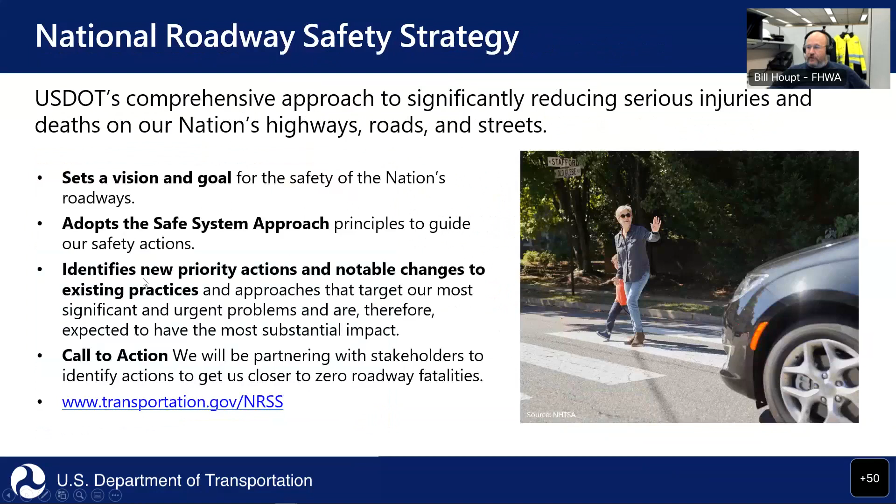So here you see the safe system approach, which is one of the key components of the National Roadway Safety Strategy, and is somewhat of a shift from the conventional infrastructure-focused safety approach. While no crashes are desirable, the safe system approach prioritizes those crashes that result in death and serious injury. It recognizes that human beings make mistakes and are vulnerable, and attempts to design a system that works together, providing layers of redundancy to lessen the effects of these mistakes and vulnerabilities. Fatalities and serious injuries have really been on the rise the last few years in Pennsylvania, and on a national level they've been increasing over the last decade.

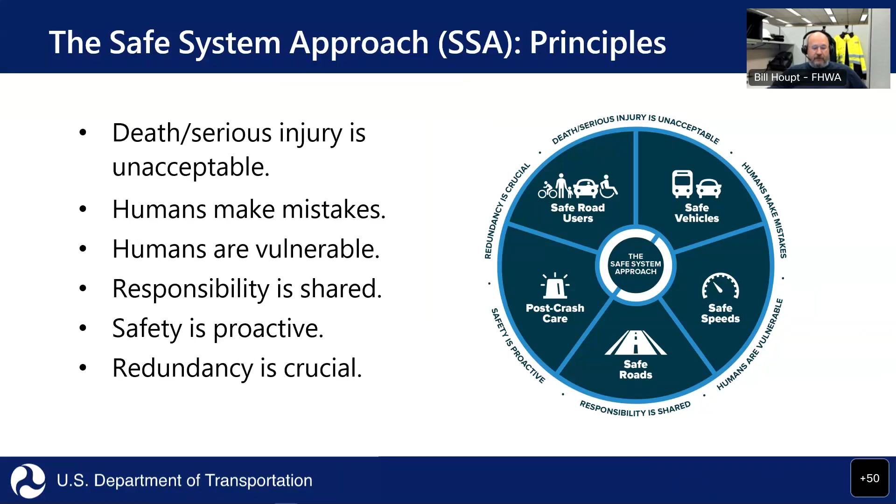Even more so, crashes among the vulnerable road users, specifically pedestrians and bicyclists, have been increasing even faster. And this has really resulted in a focused emphasis on these vulnerable road users to try and reverse this trend. Addressing all the various road-related fatality types is really going to take a holistic approach, and that is what the National Roadway Safety Strategy attempts to do.

And as part of that strategy to address all road users, the Bipartisan Infrastructure Law created this Safe Streets and Roads for All grant. This grant provides $5 billion between 2022 and 2026, and this grant specifically is addressed at non-state entities such as an MPO, county, and local government. It's a little bit different than the HSIP program that was

But there are two types of projects that can be applied for. These are the implementation grants and action grants. And basically, before you could do an implementation grant, the applicant must have a safety action plan in place that meets the requirements of the grant. This is somewhat similar to the HSIP program that requires states to have a strategic highway safety plan. But this is, like I said, addressed at those non-state entities.

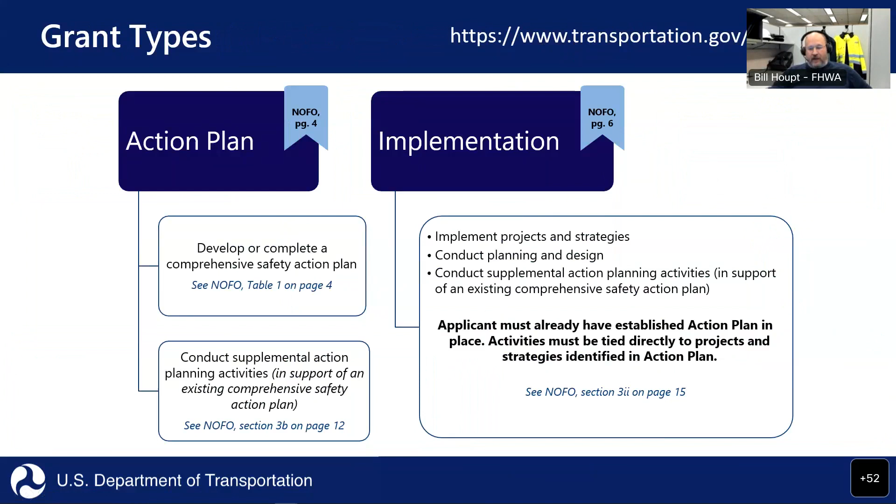And this is kind of a slide that really gives you some direction on how you can go about figuring out what you need to do. And let me see if I can go back to this last slide. I just wanted to point out up here in the upper corner, there's a link to that grant if you want to find out more information. And really, there's a lot of details on there between the different plan types and what you need to have for both. So I just want to make sure I pointed that out.

And like I said, this is telling you to look at what you have. Do you already have an action plan? If yes, does it meet the requirements? Because there's specific requirements that the action plan has to have before you can do those implementation plans. And the implementation plans really specifically have to look at those actions that were in your action plan and address one of those.

And finally, I just wanted to thank you guys for the opportunity to speak this morning. Just give a brief introduction on some of the things we're working on, and really just remind everyone what the focus and purpose of everything we do is, whether directly or not.

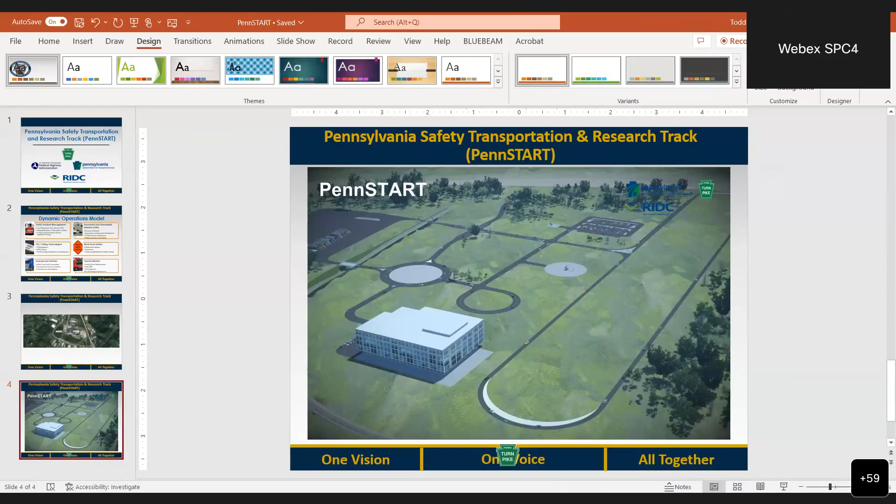Thank you very much, Todd. Greatly appreciate that. I know you have a busy week here, so I appreciate you squeezing us in for our presentation. Are there any questions for Todd?

Coming at you live from my living room. Looks cozy.

I'll just make one comment. It stinks that the original plans fell apart at Penn State, but it's great to see that this has moved into our region for our first responders and for our universities and everything. And not to mention, it's about 15 minutes from my house, so this will be excellent. Yeah, I think this will be a facility that could be used very, very much.

We were happy when we did the press event. We had Chief John Story, who's a good team partner for us, who's the assistant chief for the Hempfield Township Fire Department, and they helped us out. And we're excited. We want to get some training through our Penn Time group set up for when the facility opens. Part of the facility should open by the end of 2023.

With the rest of the facility, they would like to move aggressively and have it open by the end of 2024. So they're starting Monday, the 24th, with a meeting to talk about some of the design elements they want to put in here, and go from there.

Hey guys, can you guys hear me? Anthony Castellone? Yep, we can hear you, Anthony. Hey guys, welcome.

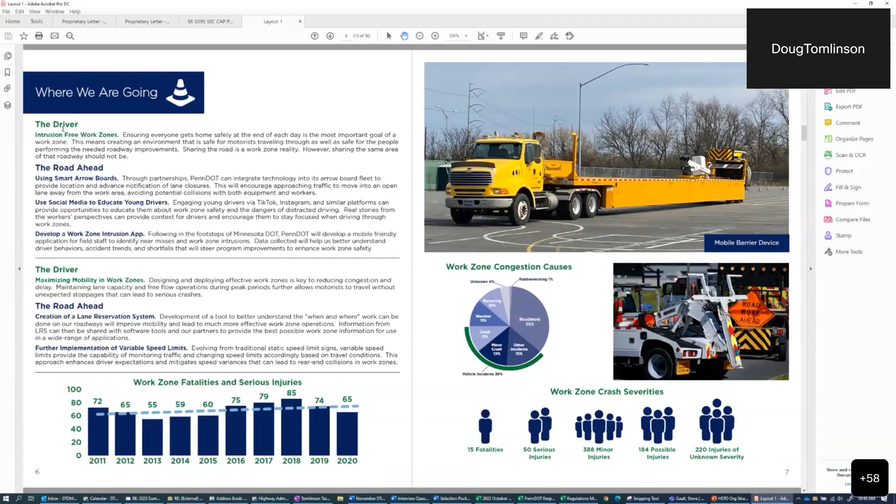And then we go into what we're describing as where we're going for the next few years, trying to step back, each of the units step back and look at what they see is truly driving their business. And then from there, what are we doing? What does the road ahead look like here over the next couple of years? So it's laying out some of the more major undertakings that each of these units are going to be striving for over the next few years.

So that's the document in a nutshell. It goes through and does the same thing for each of the 12 units. So if you're interested in understanding what HSTO is about, what we're trying to do, and where we're heading, this is a good document to do that. So with that, I'll turn it back to Josh.

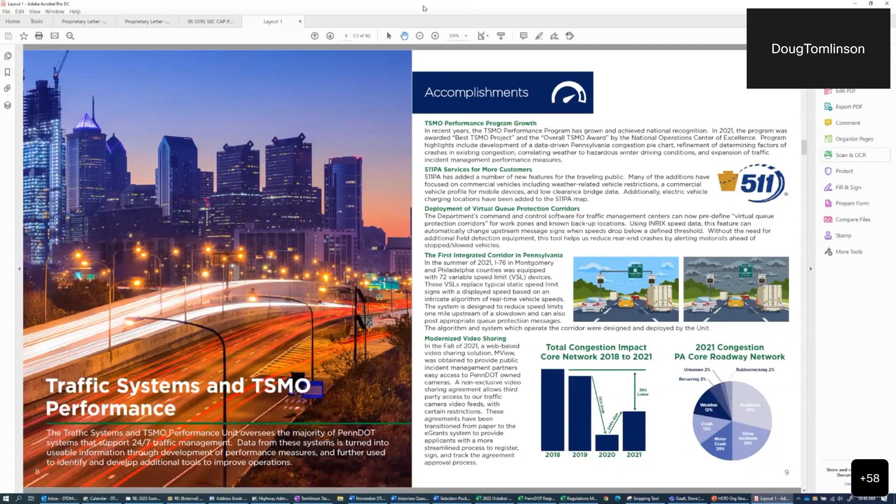Excellent. Thank you so much, Doug. I appreciate it. Any questions for Doug Tomlinson? And yes, I do have a copy of this. I will make this available to the group after the meeting, as well as it'll be posted on our website. Any questions for Doug? All right, hearing none, we will move on to item number 5 on the agenda.

I'd like to introduce Mr. Scott Thompson Graves. He is the Senior Vice President with WRA, and he will be talking about the City of Pittsburgh Smart Spines Project Update. Scott, I'll turn it over to you. Thanks. Are you guys able to see my screen, Josh? Yep, you are good. All right, perfect.

Yeah, so thanks for inviting me, Josh. Josh had asked me to give you guys just a brief status update on the City of Pittsburgh's Smart PGH project. So just a little bit of background. I know we've talked about this previously in this venue, but for those of you who aren't familiar with it, it's an advanced traffic signal and systems project along 8 corridors in and approaching the city of Pittsburgh. It includes a total of 135 intersections, and it's a pretty interesting deployment of a mix of different technology in order to improve mobility.

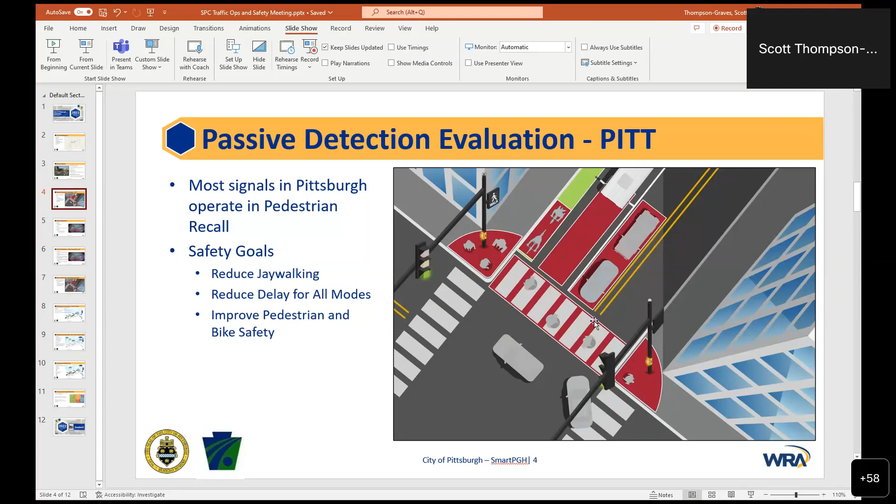So some of the challenges that we run into as we started to think through that system within the city of Pittsburgh specifically is that a lot of the corner radii at the city streets are actually pretty tight. And so if a pedestrian arrives at a corner, like the one that's shown on the forefront of the screen here, you don't really know which direction they want to head in the traffic signal. And so that poses a specific challenge for passive detection.

Another challenge is that by default, if you push a push button and actuate a pedestrian phase within the traffic signal, that is a locking call. And that poses some challenges as well, because a passive pedestrian detection system will detect someone as they arrive at the corner, but then if they depart, it'll have placed a pedestrian call, and with those locking calls, that'll then hold that phase and call it even if nobody's there. At that point, you're pretty much back to square one, and the signal's operating like pedestrian recall.

So some of the advances that we've been able to work through working with Intelight and their MaxTime folks, as well as the local provider of the software, is the introduction of a ped cancel feature, which I'll talk about. We've also included the ability to, since we can detect pedestrians that are in the crosswalk, if a pedestrian is going slower than anticipated, program the signal so that it will extend the adjacent phase. So if there's a pedestrian in the crosswalk, we basically just won't release the potentially conflicting vehicular movement in order to allow those pedestrians to safely cross the street.

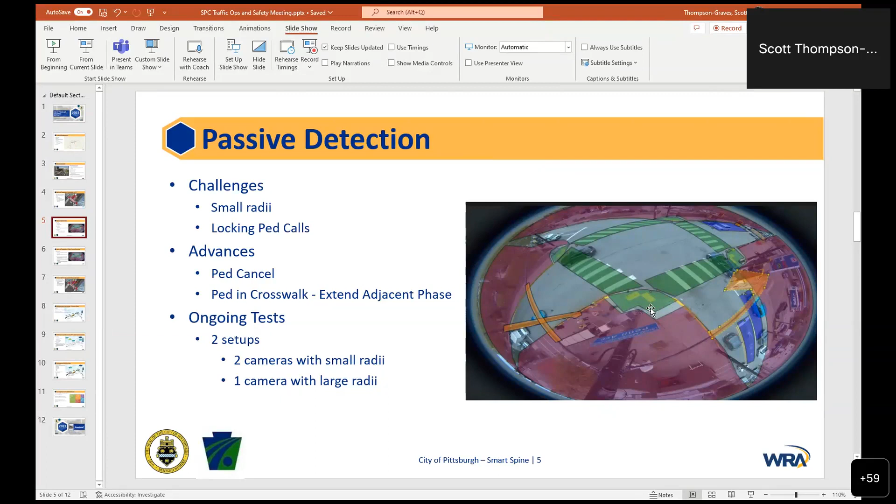As far as the pedestrian rules we're using in our traffic signals, by default we're assuming if there's a pedestrian on any of the main street phases, so 2 or 6, the other phase will automatically be called. You'll always get the pedestrian phases called for basically both sides of the street. The same thing happens on phases 4 and 8, the side street calls. That helps improve safety and mobility because we're trying to cut down on jaywalking.

At the corners with the close ADA landings that I described earlier, we've established a set of rules to help overcome some of the challenges with not knowing which direction the pedestrians want to head.

Any pedestrian arriving at any of the corners will automatically call both the Main Street and the side street pedestrian phases. The next ped phase in order will automatically be called, and that'll be a locking call. So if they arrive and ped phase 2 is the next phase to be called in order, that's automatically going to be called. If the pedestrian then departs the corner, the remaining phases will be canceled, so they won't be called if there's no longer a pedestrian there.

That's new functionality for the controllers that's recently been deployed, and it required some custom programming to make it work.

The University of Pittsburgh is doing a before and after study of the pedestrian detection deployment at both of these locations. They're evaluating not just the effectiveness of the equipment at detecting pedestrians, but also things from a design perspective. Neither of these intersections are ones we designed — they were just pilots that were already available elsewhere in the city.

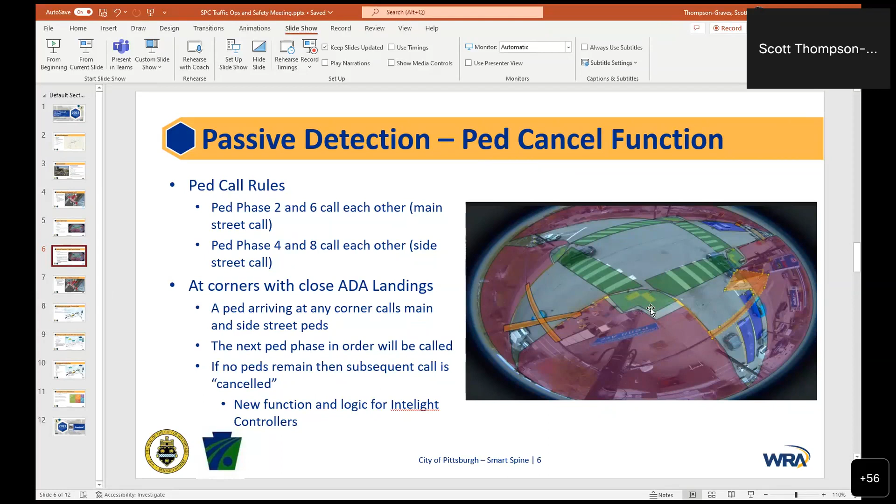Another advancement we're requiring from our detection system is to treat the detection we deploy at intersections not just like traffic signal detection, but more like an ITS camera as well, because a lot of the cameras, radar, or other detection systems available can actually get a lot more information than just whether somebody is in the detection zone or not.

Most of the equipment these days can produce information on what type of object it is — is it a truck, a bus, a car, a pedestrian, a bike, a scooter? Most equipment can do that, and can also track the trajectory of the users of the intersection. So we're requiring the selected vendor to be willing to agree to provide that information to anybody using an open API.

That information can then be transmitted, and if you think about it downstream, we can use it for more advanced performance metrics. Instead of just knowing there's a pedestrian at the corner, we'll know there are 3 at the corner. We can evaluate speeds, and the information can be used for near miss tracking and safety evaluations. It could also be used for testing by the OEMs and tier 1s operating within the city streets, so we can provide information from them.

It could also be used by researchers, of which there are many in the area, like Carnegie Mellon and the University of Pittsburgh, who can use this information for both development of new applications and technology, and also for evaluating how systems work. So it's a pretty exciting way to think about things when you look at the advancements available these days.

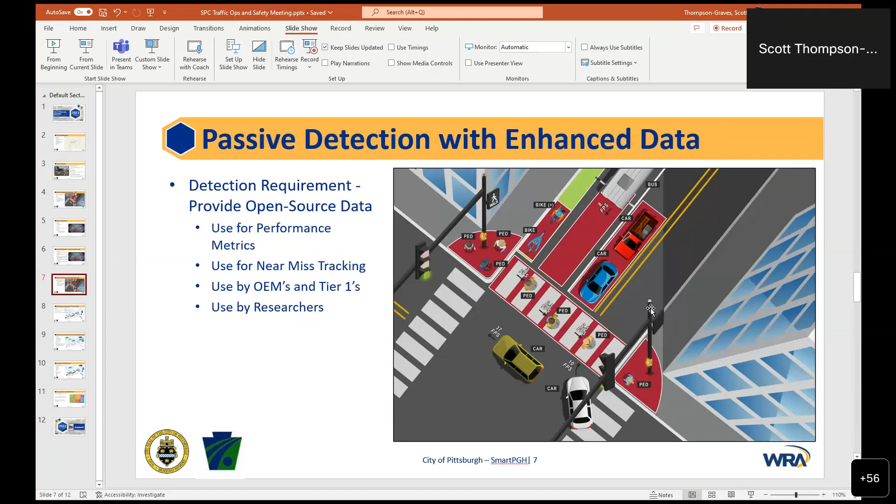Other elements we're working on are the performance metric suite. The system will be able to transmit automated traffic signal performance metrics to the traffic management center, get bike, bus, pedestrian, auto, and truck counts and delay by movement for every intersection in the city, as well as object tracking and trajectory data. We'll also get OD flows and speeds through Wi-Fi or Bluetooth detection, plus air quality, pavement surface condition, and weather sensors deployed at locations within the system. All of that information will be available to the traffic management center.

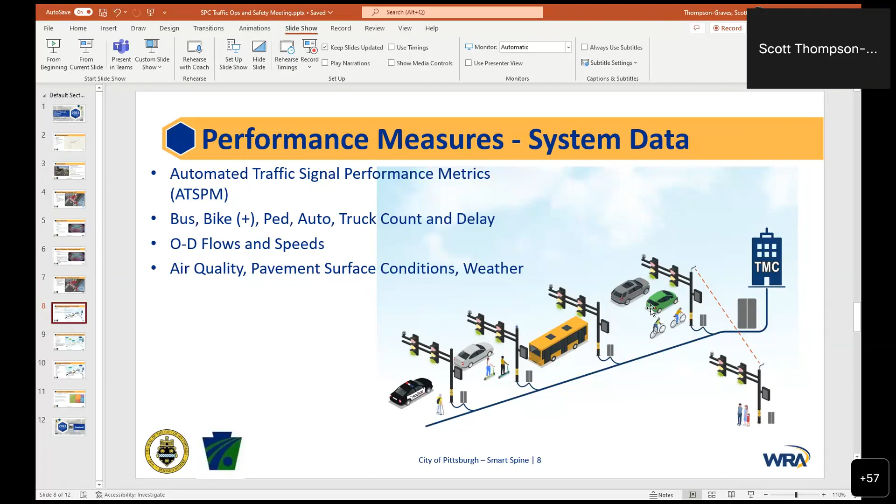At the same time, with our cloud-based priority and preemption system, we'll have direct connections with transit agencies' AVL system and the public safety AVL system. We'll be able to get and use that data to help operate the system, and to operate it to the benefit of the transit agency and public safety.

We'll also have public agency third-party data. We'd like to get a feed into the PennDOT crash information tool, there are autonomous parking meters the city has deployed, and the 311 system. All that information will be available to the center and to researchers to help better operate the system.

From a connected vehicle standpoint, there are opportunities for two types of information we can transmit. The first is high latency data, which could be anywhere from a second to 3 days depending on the feed. A high latency API can be established through the cloud between our system at the traffic management center and other OEMs or tier ones operating in the city, as well as other parties such as WEJO or INRIX Signal IQ.

We can provide information valuable to them for navigation, environmental conditions like icy pavement or snow, and congestion data, as well as traditional connected vehicle map and SPAT data. We also have the opportunity to put in roadside units that provide a very low latency connection, giving us object tracking from the detection system, as well as SPAT data, map data, and basic safety messages.

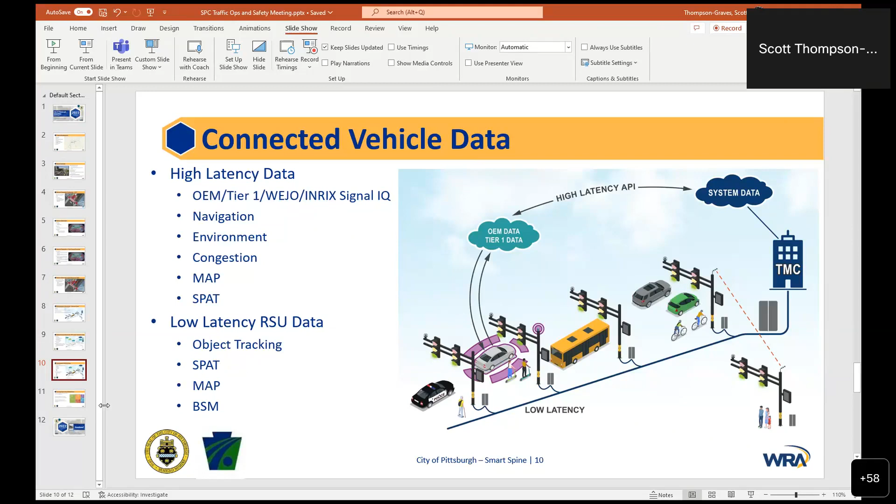We're in the process now of meeting with a lot of the OEMs operating within the city and the tier ones to find out what information is useful and determine what test cases we'd want to roll out. But the challenge with these systems is you've got to turn that data into actionable information, and we're working through that process in more detail.

If you think about a system like this, it's brand new for the city of Pittsburgh. It's going to come with a lot more maintenance burden, and a lot more burden for the city to operate and take advantage of the system. So you've got to think about performance metrics in three different ways.

The first is, what performance measures can we produce that assist with day-to-day operations of the system? It could be a flag that a detector is no longer operable, or something like bathtub floods where PennDOT shifts traffic onto arterial streets, or an incident on the parkway requiring traffic to divert, or snowy conditions where the city needs to change signal operation to account for longer offsets between intersections because traffic slows down.

The expectation isn't that you'd have to hire a professional traffic engineer who can digest real-time automated traffic signal performance metrics to make decisions. We're working on developing a set of performance measures that would assist with those day-to-day standard operating procedures.

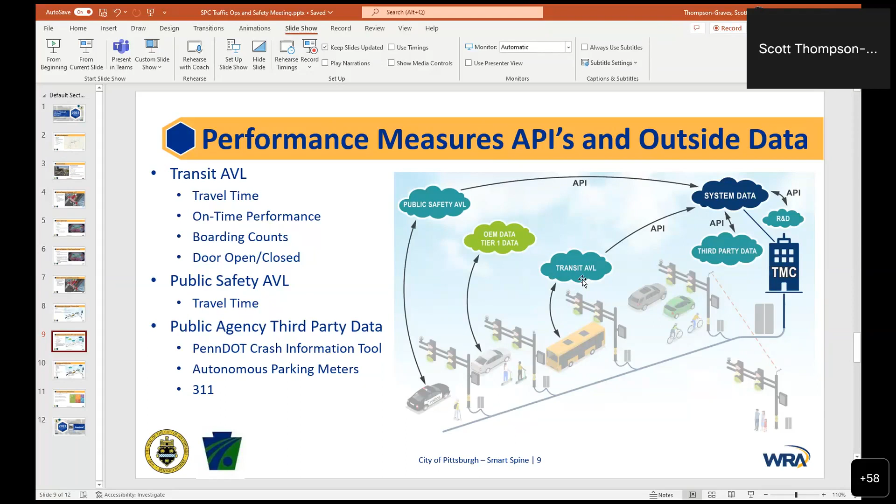Excellent, thank you Tom and Noah. Any other questions for Scott? All righty, hearing none, thank you very much Scott for the presentation, we greatly appreciate it.

So last but not least here, we will bring up our last presentation before we get into some quick ongoing activities here at SPC and some updates, and we can open the floor for discussions. Myself and Keith Johnson of Gannett Fleming wanted to give a quick presentation on the State Route 19, I-70, I-79 diverging diamond interchange before and after study. This is one of the first ones we've actually done here at SPC, working with Gannett Fleming, as an additional service to our planning partners at the district. We normally do road safety audits, but this time we were requested to do a before and after study from PennDOT District 12. So we'll give a quick presentation.

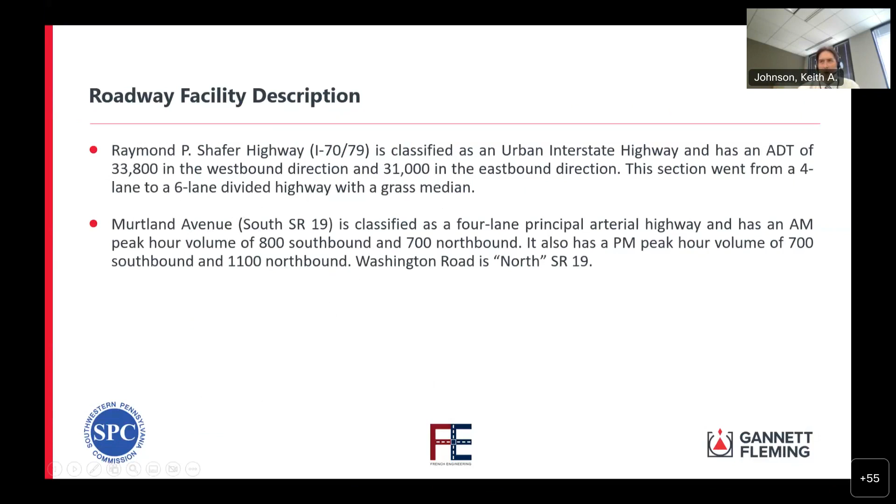So what we have here is I-70/79. It's combined out here, and has an ADT of about 34,000 westbound, 31,000 eastbound. The previous interchange is with SR-19. It's mostly called Murtland Avenue in the area we're covering, but it's also called Washington Road north of the interchange. This is what it looked like before: it was a cloverleaf. We have a weaving section on the interstate, and a weaving section on 19. Next, this is during the construction, and this is the final product.

I'm assuming most people on the call understand how diverging diamonds work, but I'll do a brief one. This was the first diverging diamond built in Pennsylvania. There's a couple others in the works or already constructed, but this was the first one. If you're not familiar with them, it gets a little confusing, so just hop on YouTube, type in diverging diamond, and you'll see how these work.

More or less, if we're going north on 19 here, you have a signalized intersection here and a signalized intersection here, and once you go through the intersection, the traffic is switching sides. You're in Europe for a little bit, okay? You're switching sides, then you're coming up.

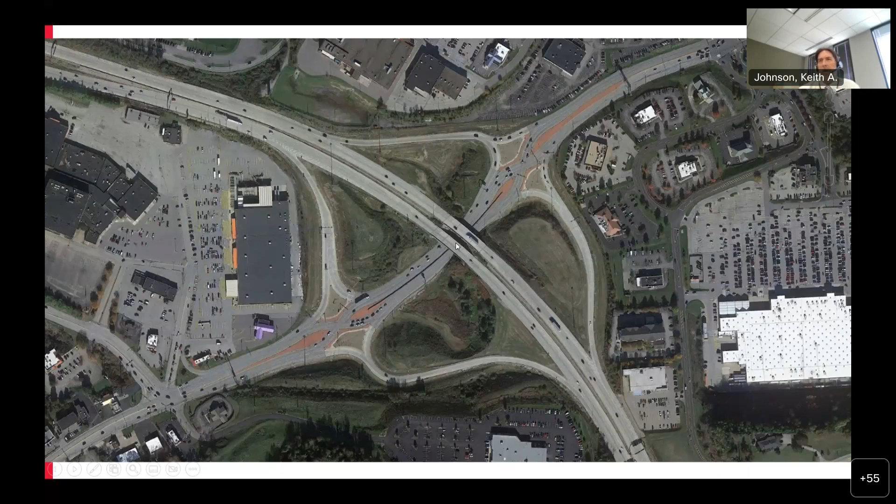The reason for that is, one, you only need 2 phases at the signals, and two, if you have a lot of left turns, you've basically eliminated the left turn. Any traffic from this direction that wants to take the ramp won't have to go through the intersection. So it reduces the phases of the signal, and if you have a lot of left turns in either direction, it reduces the number of lanes you need in the midpoint, which was key with picking the DDI for this.

We mentioned the purpose and need. So a point of access study was done in 2012. And if you're not familiar with point of access, we institute those whenever we're looking at changing an interchange on the interstate, and it's a full study documenting different alternatives, the pluses and minuses, also signing, things of that nature.

I won't go through all of these, but these were the basic needs of the study. There was a pavement issue out there. The existing level of service wasn't that bad, but future projections were showing you're going to have a deteriorating level of service. The cloverleaf interchange itself was substandard. Everything from the horizontal and vertical design elements, the decels, obviously there's a weave in there. So it was just deficient in that case.

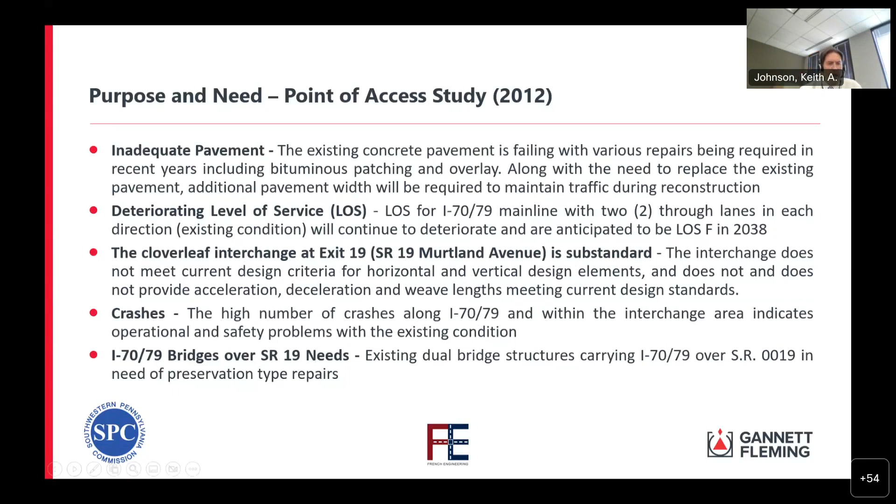It was documented a high number of crashes along 70/79, and the bridge at 19 just needed some preservation work. And then this is just a figure highlighting the things that I just mentioned. We have a weave on the interstate. We also have a weave on 19. It's officially not a weave, but that's how the traffic moved there. Plus all the decels for the ramps and everything were substandard.

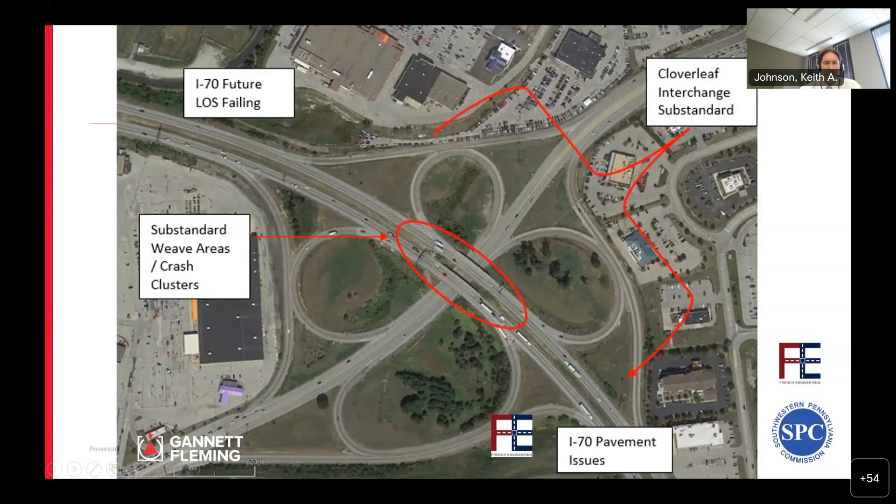The alternatives they considered in the point of access: there was obviously a no-build situation. They looked at just improving the cloverleaf, looked at a standard diamond and a modified diamond, also looked at a SPUI, and went with a diverging diamond. I'm going to skip over some of these things.

It was more to provide SPC with all of this, and Josh, I meant to ask you, is the report online? It should be. If not, I will make that a priority to get it up there ASAP. Okay. Yeah, it just dawned on me this morning.

Obviously, it makes sense to go through the report to get the big background, because a lot of times when people are talking about DDIs, they're comparing it to a standard diamond interchange. And we didn't have a standard diamond interchange here. We had a cloverleaf, but the advantages of the diverging diamond were why they went with it. We document the reasoning behind all that in the report if you're interested.

The issues that came up as they were looking at updating the cloverleaf or a standard diamond interchange: they were requiring a 4-lane bridge on 70/79, which introduced excessive costs. They were going to have to replace both the bridges at 19 for the cloverleaf because of the substandard deficiencies there. If they went with either the SPUI or the diamond, they were going to need dual left turn lanes from 19 to get to the entrance ramps. That would have affected the current location of the bridge piers for 19. So there was a cost issue there.

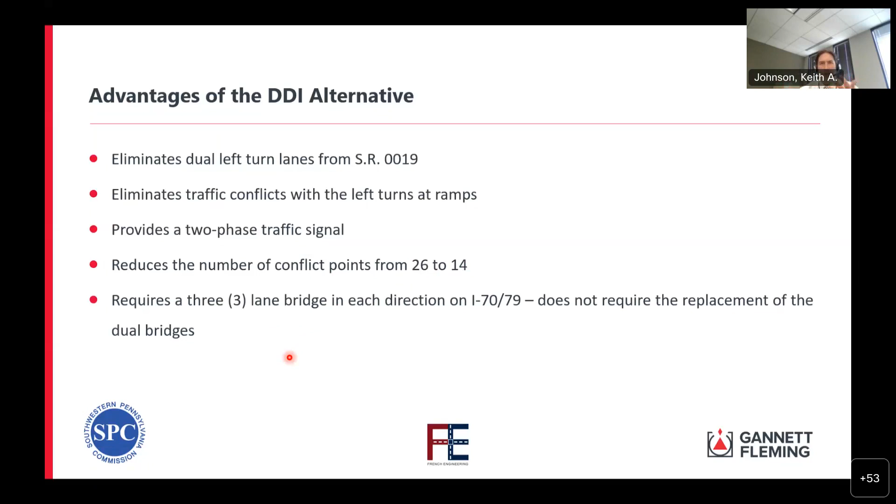Disadvantages with this one, again, usually we're comparing a standard diamond with a DDI. One is we are introducing 2 new signals. Previous to the project, it was a weave type condition on 19. So we're introducing 2 new signals. The speed would have to be reduced because of the signals, and everyone was a little antsy about coming up with a DDI, and whether people would be confused by it.

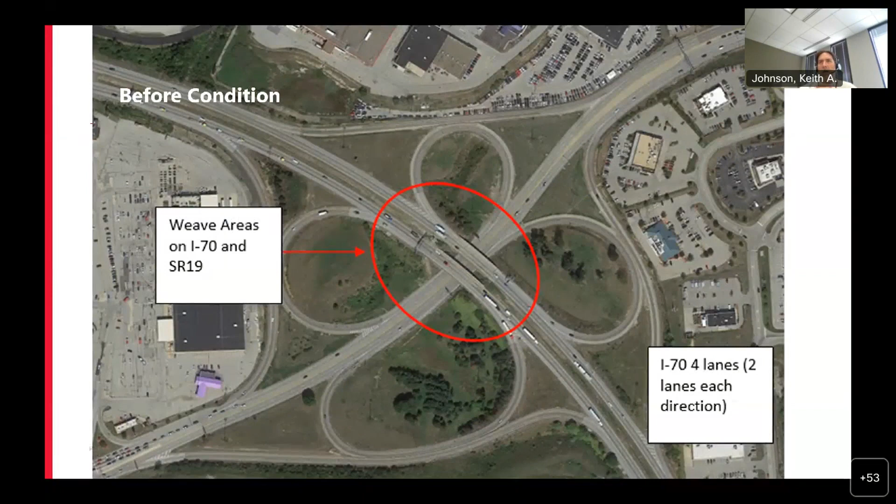Again, just citing the before conditions, it was 4 lanes here, and we have 2 weaves on 19 and 70. And then after, again, adding the signals, but also eliminating the weaves. Also, just improvement overall to the whole ramp configurations as far as the deficiencies with the accels and decels, those were all fixed. And 70 was widened to 6 lanes.

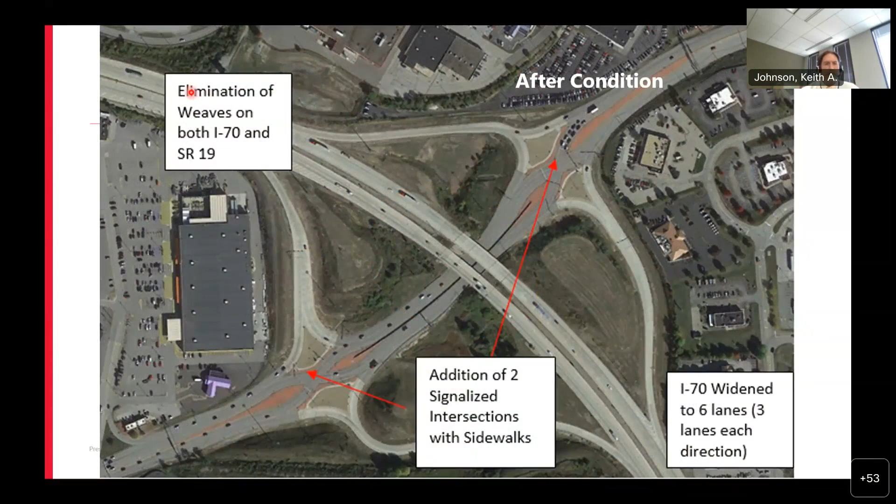Crash analysis, and I'm not going to go in depth with all this, but just to give you an idea. So before we did this, we're always trying to figure out what we think we're going to see here. Obviously, with the elimination of the weave on the interstate, we thought we'd see crash reductions on the interstate as a whole. And then 19, again, just doing our little guessing at the beginning here, we weren't sure what was going on. We're introducing 2 signals, we're removing the weave. We thought it would be a wash, or we might even see more crashes, but minor crashes because of the

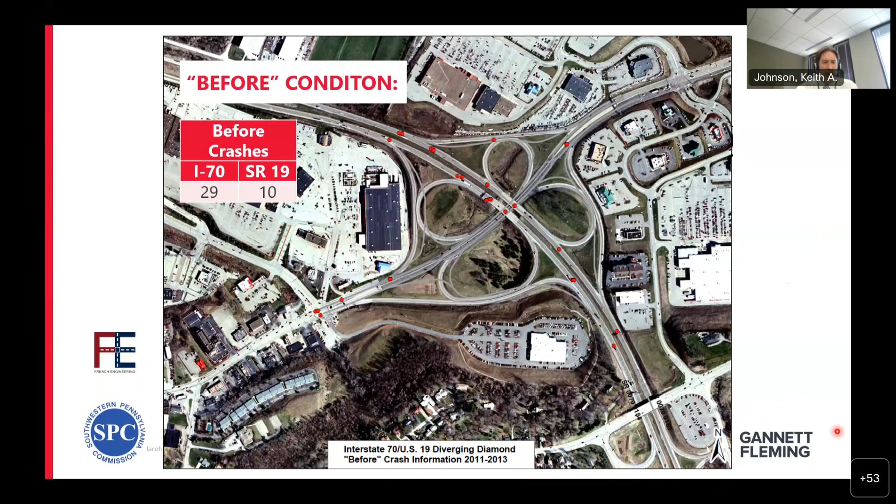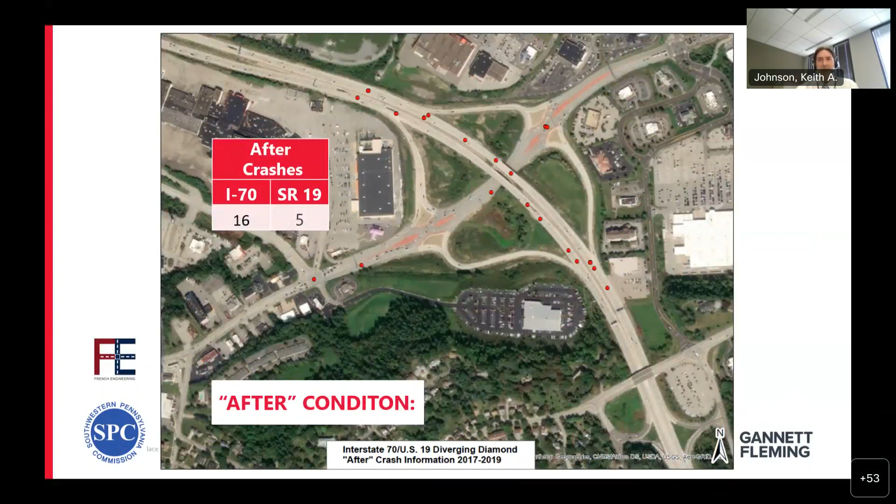signals introduction. The before condition here, again, 3-year time frame. We are looking at 29 crashes on 70 and 10 on 19. This is the before condition. And then the after condition, what we saw was crashes went from about 29 on 70 to 16, and we also got a reduction in crashes on 19. That was somewhat of a surprise.

The only thing we can really, again, not diving into everything, only thing we saw there just sort of happened in the office. One of our bridge engineers actually lives down here. We mentioned we were doing a study, and of course, all traffic people love DDIs. We think these things are great. And I mentioned we're doing a study of the DDI, and he goes, "Oh, I hate that thing." I'm like, "Why do you hate that thing?" And it's like, "Oh, they put those signals in." I was like, "What do you mean?" It's like, "Oh, I used to just sail through here. There was no, there's a signal here and a signal down here." And he said, "I just used to sail."

I assume when he says sail, that means he drove really fast. So I don't know if we can attribute it to it, but it's possible because we introduced the signals. People were speeding through here. It's very easy to go through there quite quickly before the signals. We might have had a traffic calming effect on this. So when you look at these numbers and we have them summed at the bottom, the main thing that we came out of this is we reduced crashes on the interstate by about 45%, and on 19 crashes reduced by 50%. So that's a big takeaway with all this.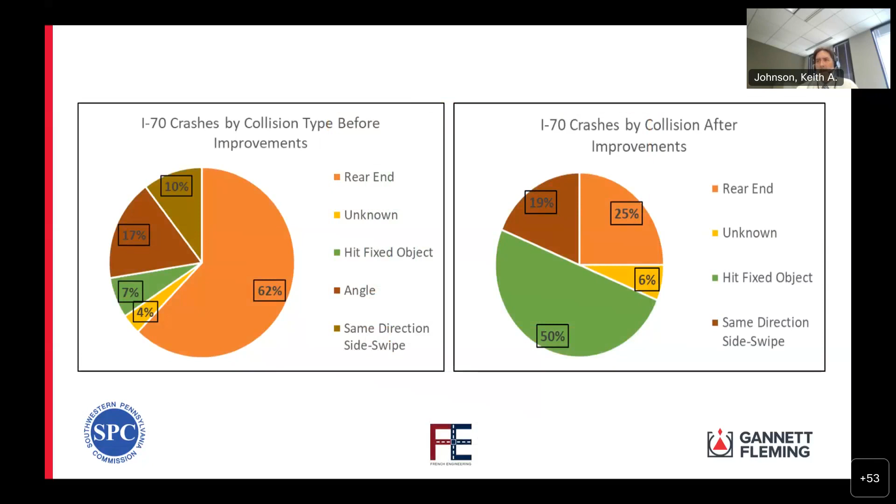On 19, again, just a reduction of these. And just to point out here, we had no angle crashes in the 3-year after, which is surprising. You usually have those. And luckily, we had no pedestrian crashes. So those are some advantages that we got as far as looking at the types of crashes.

Doing a level of service, at first we weren't sure whether we had congestion issues or not. French Engineering helped us with doing some data collection out there and some analysis. We decided to collect it. Also, the traffic from the point of access study, it was published in 2013, but those were based on counts that were originally done 6 years prior. So we just decided we needed fresh counts to do this. Again, I'm going to skip quickly through this part.

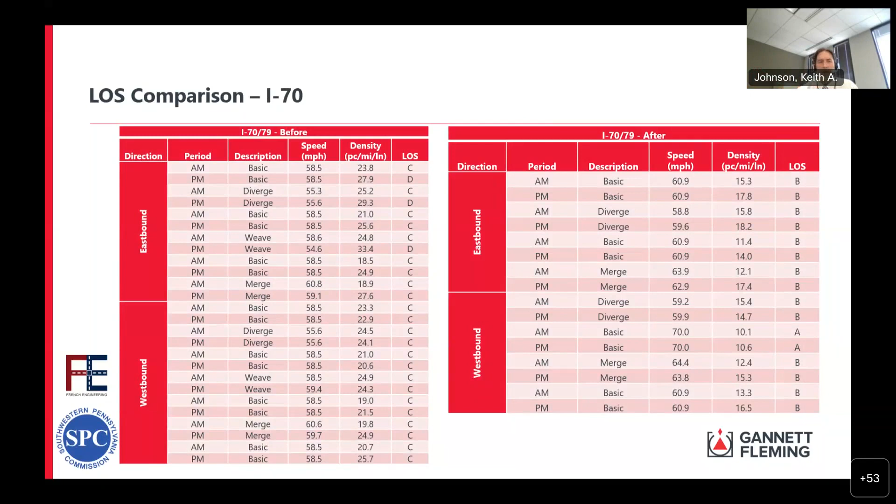It boils down to, as far as level of service comparison on 70, it was functioning at about a level of service C, sometimes a D at certain points for the before condition. In the after condition, we're at a B or an A type of thing. So obviously it got improved. Plus we widened it, so the weave went away and we widened. At the same time, we weren't necessarily in a seriously deficient level of service out there as far as the time frames we were talking about.

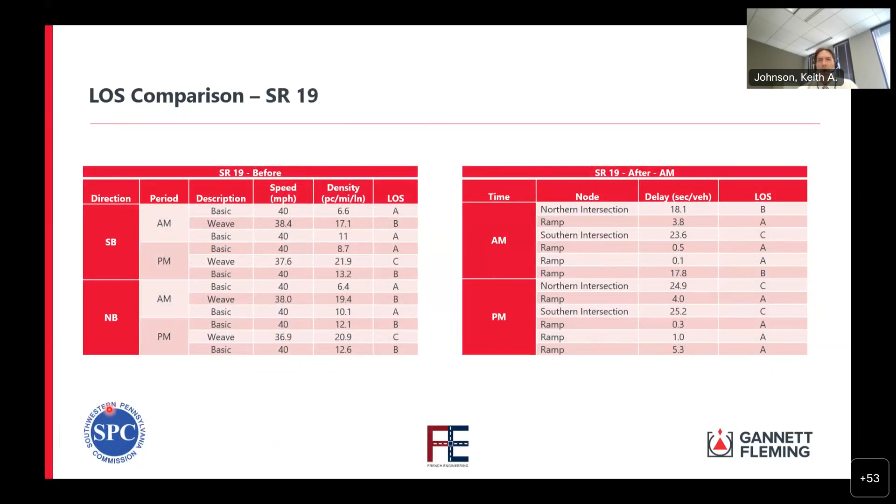On 19, again, we introduced 2 signals. However, they operate fairly well out there. In the before condition, in the weave area, it was operating at about a C, and depending on the time of day, with the intersection, we're either operating at a C or a B. So it seems to be operating fine. Obviously, travel time increased because we introduced the signals.

So the benefit cost analysis, there's a number of different ways you can do benefit cost. When Bill and Jeff were talking about these NOFO grants, if you get involved with that, there is a very detailed way about doing benefit costs, and through the ages, everyone does them a little differently. Our basic setup is the same though. We were lucky to have construction costs available for this. You want to analyze those costs.

And with the benefits, we were just looking at crashes. There is a way to assign dollar amounts to those crashes, and I'll show you where that is. And then it really boils down to you have your benefit, which is your savings from the crash reduction, and your annualized cost of the project. Oh, I had one slide. I did remove that one.

One thing with the annual improvement cost, so we knew how much the project cost, and the actual construction cost included things more than the diverging diamond. There was some work done toward the west. We eliminated those, and then we eliminated a couple other items from the actual contractor cost. We had about 34 million. You apply a discount rate, and there's some background with the discount rate. The idea is you're applying a cost of using that funding. Again, those NOFO grants, they detail what you should use for that.